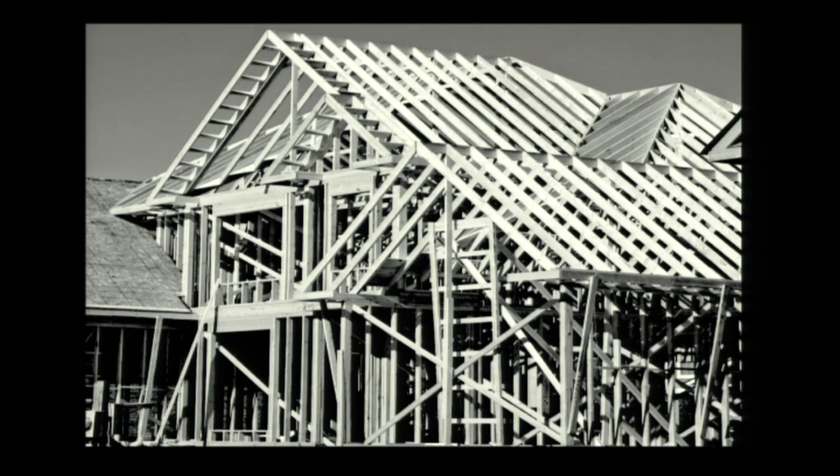And the science of wood is really changing, starting with that idea that the most simple things really can become the most profound solutions. Buckminster Fuller's a great engineer. This quote, that there's nothing in a caterpillar that tells you it's going to be a butterfly, which is very much where we are with wood. So when we talk about wood, most people think about wood buildings this way. And if you live in North America, as we all do, we've been building this way for 300 or 400 years. There's not a lot new in the way we build in lightweight wood. But obviously that's going to change.

Living in Vancouver, Vancouver's got this goal of being the greenest city by 2020, like lots of cities do. One really nice part of our story is that the company that powers the steam loop for the whole central core of Vancouver has just made a decision to move from natural gas to biomass, and that's going to cut Vancouver's greenhouse gas emissions by 25% by 2020. So we're actually going to get to where we are going, and that's going to be driven by, believe it or not, food waste and then wood biomass. So we are making headway.

But sometimes I have to kind of step back and say, as beautiful as Vancouver is, as beautiful as Seattle is, Vancouver looks like this a lot of days, right? We live in the rain, and we effectively live in a concrete jungle. There's not a lot of nature around us. We build buildings the same way over and over and over, and we really don't step back and say, does this make any sense?

The statistics really kind of bear true. So 40% of carbon emissions in North America are the result of the making and operating of buildings. The same is true in energy. 49% of our energy use in North America is from the making and operating of buildings. Transportation is second on that list. It's kind of the main conversation, but buildings are really the single largest industry that will impact how we look at energy and climate change in the future.

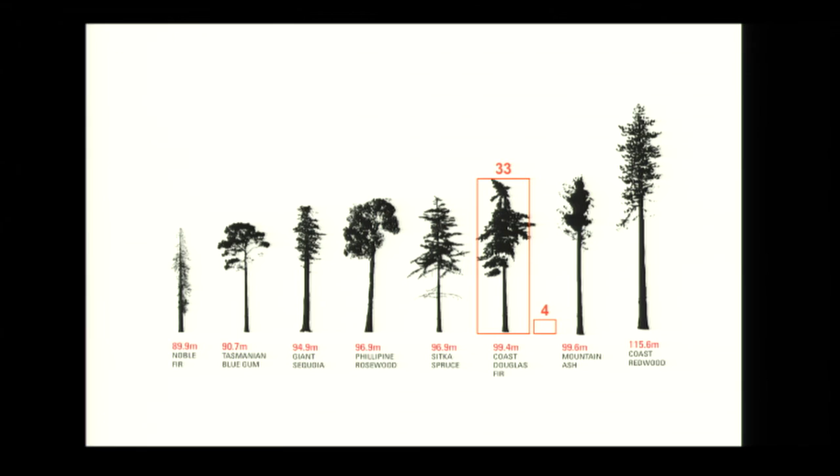So I sit on the design panel to review projects coming into UBC, and here are all these proposals for concrete building after concrete building, literally across the street from trees that are the exact same height. Obviously, there's a conversation of why can't we build buildings much taller, but here in Washington State and lots of places, we still have these limits of height. In BC, we now have 6 stories we're allowed to build in wood, but everywhere they've sort of capped out how tall we can build wood buildings for these urban environments. Everywhere they've done it on the assumption that we're going to build the exact same way we've been building for hundreds of years with lightweight wood frame construction.

So our work has been really about, you know, this number, 30 stories. That was a number we threw out. I threw out in Australia first about 7, 8 years ago, and people thought we were crazy. There's no way you can build a wood building this tall. And in fact, one of the best engineering firms in the world, the leader of their wood sector out of the UK was with me, and he said, absolutely, you can't build wood buildings above 10 stories. But in the last 8 years, what's been happening is this shift and this sort of awareness that not only is it a good idea to start looking at wood as a material at larger scale, but it's actually very realistic for us to build at these scales. We just have to completely reinvent the building code systems and really ultimately change the way people think.

So now we're actually talking about going much higher than 30 stories. And in fact, there's a study that came out with SOM, who are a huge architecture engineering firm based in Chicago, but all over the United States, all over the world, who also built Burj Khalifa, the world's tallest building. They did a study that said they can do 42 stories by combining concrete with wood. So now what we're seeing is that an idea that at first seemed kind of insane to build in this very new way, because we largely have only had for the last 130 years these two materials of concrete and steel. Now all of a sudden we're seeing people say, oh, maybe that does make sense.

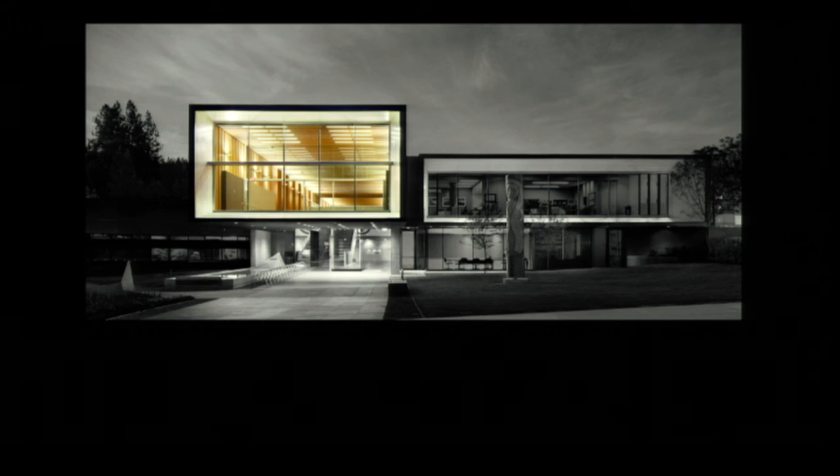But LVL and LSL have been made for a long time, and so we decided we would do this project, which is City Hall in North Vancouver, and we would do it out of LSL. And we would use it as a tool. It's an addition to an existing concrete building. So on the right is the existing building, and the big cantilever is the new wood piece. And we would do it as a tool because we were already exploring these ideas of how to build big, but what we knew is we needed to work in these huge panel sizes.

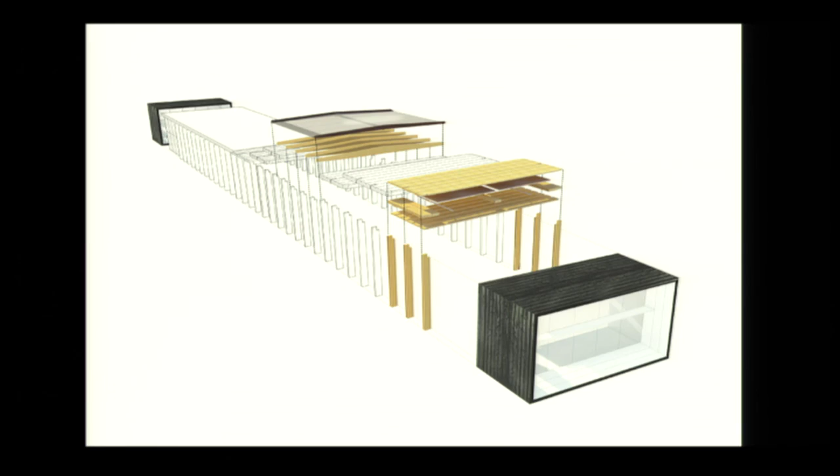So we convinced, in this case, Weyerhaeuser to give us these huge panels. They're 32 feet long and 8 feet wide, and glued them together to make this space. This material is typically just buried behind gypsum. But we said, no, it's beautiful. It's actually all aspen. It's a beautiful material. It's made out of small little flakes glued together. It's very strong. And we wanted to show how it could actually work so that we could then take these ideas and start building taller and taller.

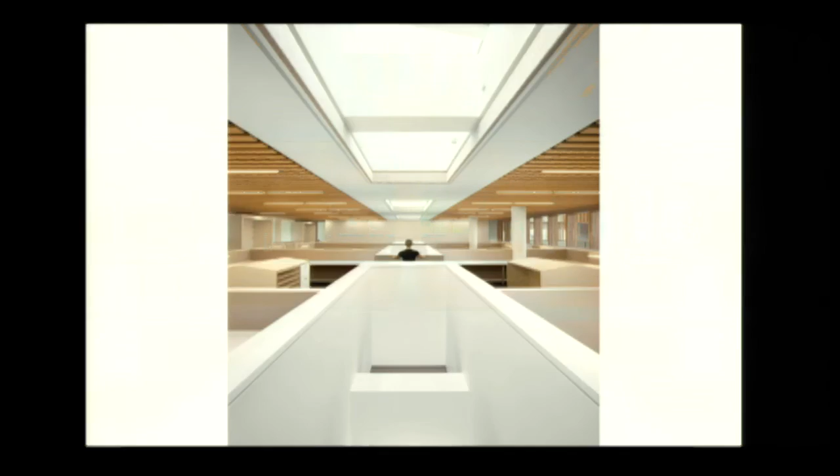And so I'll just show you a couple images of this project. It was a very interesting process because about halfway through, CLT came to Canada. So CLT, cross-laminated timber, there are 2 big manufacturers right now in North America, one in British Columbia and one in Quebec. Nobody here in the States yet. And so if you can't have 3 companies competing, it's hard to keep prices down. And so by introducing laminated strand lumber as a competitor to CLT, we realized we could keep the prices down and make these ideas start to happen.

So because our government in British Columbia realized this is good for our economy, it's good for our small forestry communities, they also recognized that they weren't going to be able to sell these CLT or mass timber panels into the small scale residential market. They started to turn to folks like Andrew Waugh in the United Kingdom and ourselves that were interested in moving into these urban environments. And at the time of the downturn in 2008, in the global economy really, we used to export a lot of our wood down here to the States, and the housing market collapsed here and everywhere.

And so we turned to China, started sending our wood to China. And we still send a huge amount of our wood to China. But when we send our wood to China, China uses it to make formwork for concrete buildings. And then they take all that leftover wood from the formwork and they throw it in the landfill. It's a travesty. So one of the things I really believe is that if you cut down a tree, you honor that tree's life by finding an incredible use for it. Even if it's the most spindly, awkward tree, its life is valuable. And we can turn it into great buildings, even though a lot of people throw it away.

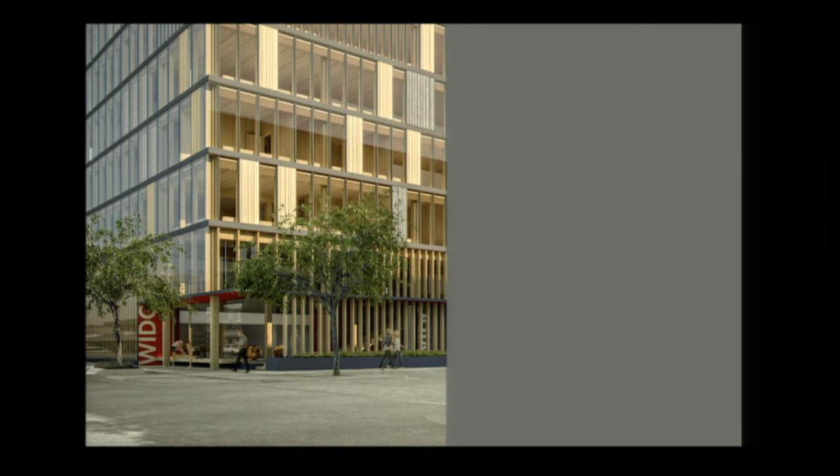Tomorrow the structure's topping out with our Premier, so that's where I head from here, actually. And so this building's already built. The main frame is up. Everything's wood, and that's a real change.

So we're not used to building this way, and so it means that we have a huge amount of research that goes into it. So we lean heavily on the National Research Council of Canada and the Forest Innovation folks in BC and different testing people to say, how does it work for acoustics and how does it work for fire and how are these buildings really going to technically perform, because there are no examples for us.

It's a great way to lose money, by the way, if you are an architect, to get involved in this kind of stuff. But it's so meaningful and it's so fun and it's so exciting because you are on uncharted territory when you build this way. So this building's unique because it's made out of cross-laminated timber panels and there is no concrete.

So we've been building these taller buildings. Andrew Waugh in the UK built a building in London that's 9 stories tall, and that was finished probably about 6 years ago now. When he first built it, it had to, for fire, be covered up. So they built this beautiful wood building and then completely covered it up with drywall to protect it from fire.

If you're going to change a system dramatically, it's got to be cost effective. It can't be about environmental issues. That might be my motivation, but that's not going to be the consumer's motivation 9 times out of 10. So it's got to be cost effective and it's got to be beautiful. Wood is beautiful and we got to showcase it, which meant we had to reinvent the way we did it.

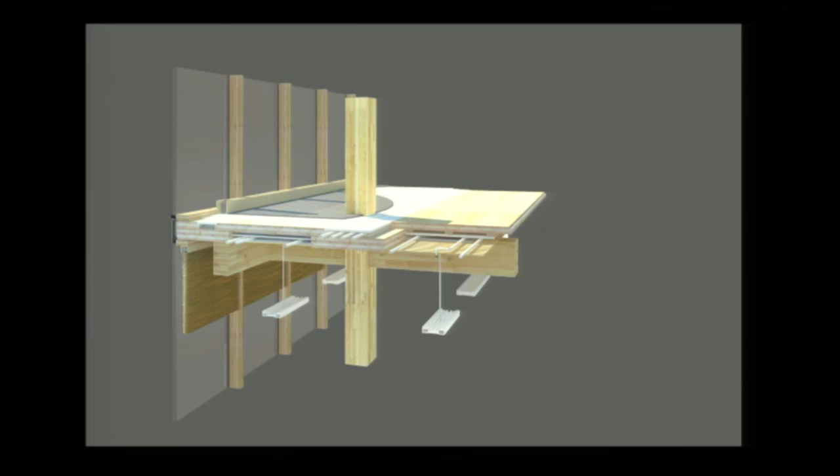So in this case, what we've figured out how to do actually is have these floor slabs that are stacked on top of each other. I won't go into the engineering side of it, but it's really exciting for nerdy wood people like me. It hides all the services, all the sprinklers and everything, so that just the wood is exposed. Kind of like a concrete building hides things inside the concrete, we've figured out how to do the same inside these wood buildings.

And most importantly, these buildings have always, to date, had a thin concrete topping on top of the floor, and they do that to control sound. But we've figured out how not to do that. And why that matters is that buildings have a life cycle.

When we traditionally look at the life cycle of wood buildings versus concrete, masonry or steel, wood sometimes suffers because people assume it won't last as long, it's not as durable, and then what happens to the wood at the end of when the building's done? Concrete you could theoretically grind up and use as an aggregate. Steel can get recycled. So what's the end story with wood? Well, the beauty of these systems is the end story literally is unscrew it and build a whole other building.

As long as the wood is protected on the outside, we can actually just keep going with this material. It's certainly going to last as long as concrete or steel as a structure, as long as you maintain the exterior enclosure of the building. But most importantly, you can take it apart. But you can't take it apart if you top everything with concrete. It makes it a lot more complicated.

So we've now figured out how these buildings will not only go together incredibly quickly and cost effectively, but also how they go together dry. We call it dry construction. And if we get rid of the concrete, we solve all kinds of problems for dismantling the building. So we're pretty excited about it. Actually, we use impregnated sand panels that dampen the sound.

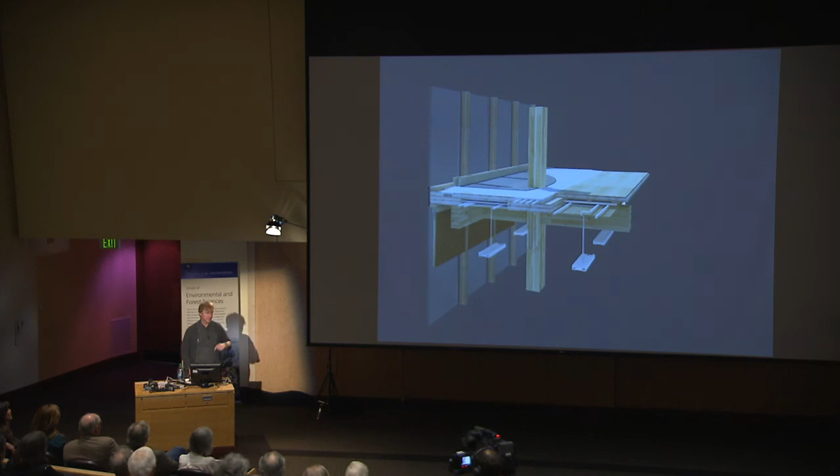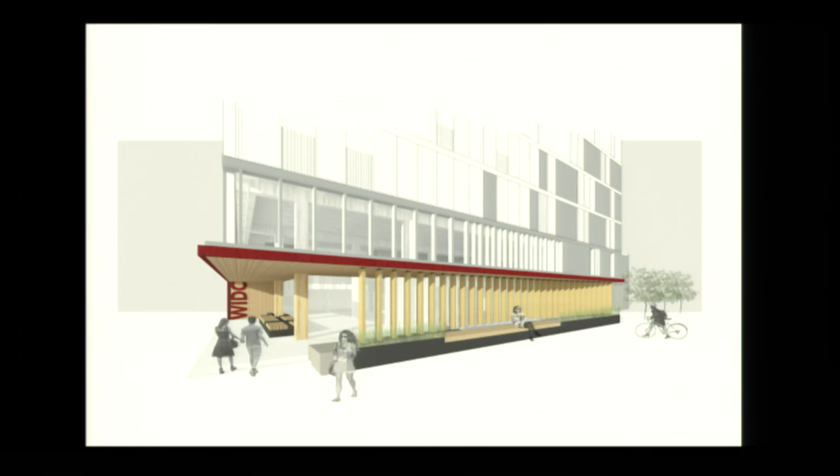So it's a highly unusual building to walk around because it's all exposed wood. And it's pretty exciting. Every aspect of this building is wood. I think I have a little movie, actually. I'll jump forward to see if this goes here.

Okay, I'm going to talk over the sound too. Because the funny part is, if you saw my TED Talk, I do a little movie in there. You're not allowed to put sound to a movie. This is U2, Beautiful Day, the sound. So Bono spoke at TED last year with me, and I thought, cool, I'll show up at TED and I'll get Bono's permission to be able to put this song on my little video. He said absolutely not, so that didn't happen.

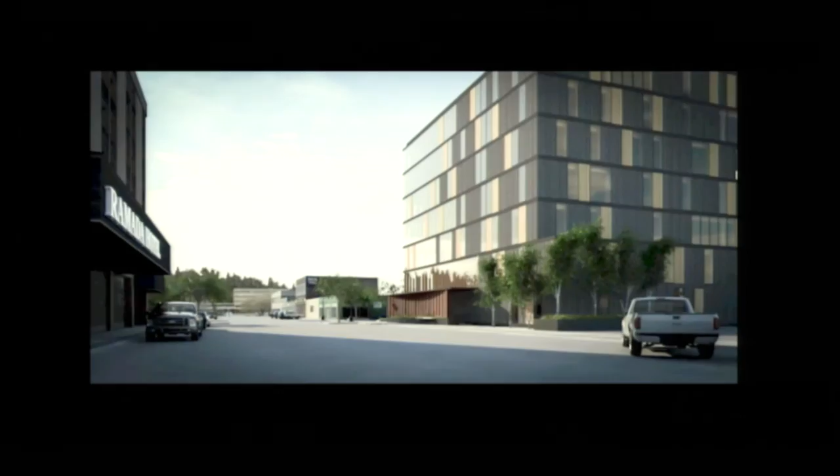So anyway, what's cool about this building is it's the Wood Innovation Design Center. So it's actually a building, sorry, I'm supposed to stay in the light for the TV camera. It's a building about wood innovation. It's actually for the University of Northern British Columbia. They're going to put an engineering program in for the study of tall wood buildings. So this is actually currently the world's tallest wood building as of this week, which is pretty exciting.

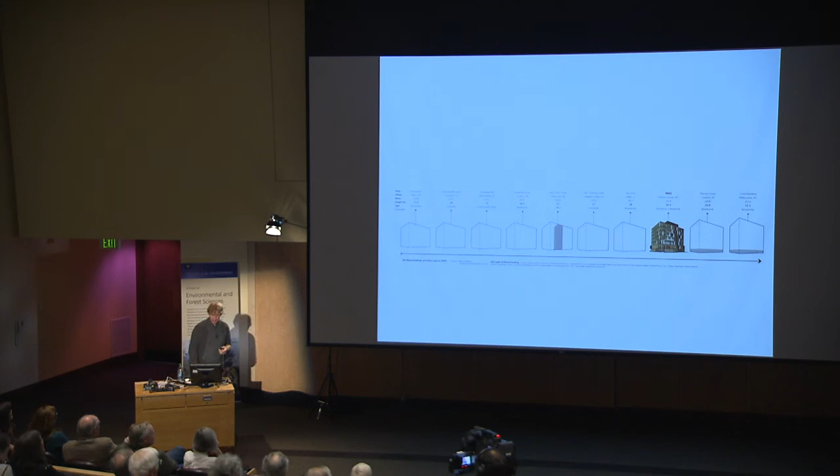So there are a bunch of these buildings being built, and as you can see, I had this funny experience of speaking at the Architectural Innovation Conference in New York with Bill Baker, who's the guy that designed Burj Khalifa, the tallest building in the world. So he got up and talked about that, and then I got up and talked about this and said, look how tall they are, isn't it great? It felt ridiculous, but we're getting somewhere. And as I said, that competitive spirit's what's going to take it. And the reason this is going to happen is because it is cost effective. And the reason it's cost effective is because these panels go together really simply and quickly.

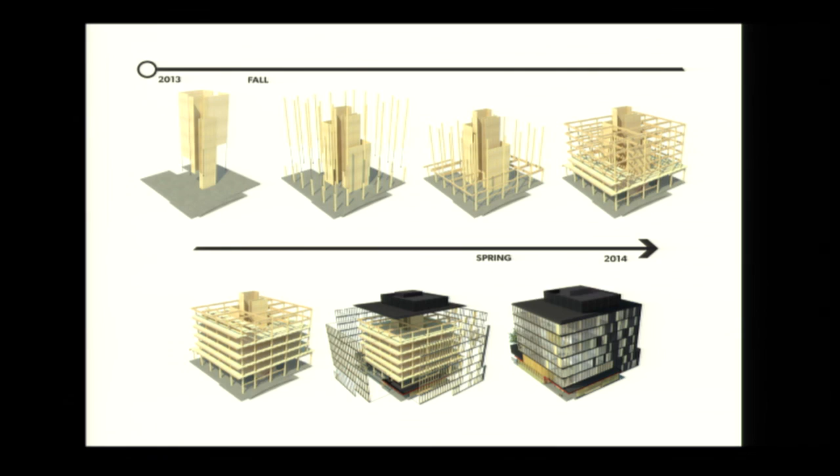An anecdote I like to tell is the Prince George project is about 8 blocks away from a Delta hotel that's being constructed in steel. On our site, the only noise you hear is cordless screw guns, very quiet, and all you hear is the sound of the construction site 8 blocks away. Putting together a wood building like this is quiet. It's completely different than what we're used to. And these things have real meaning.

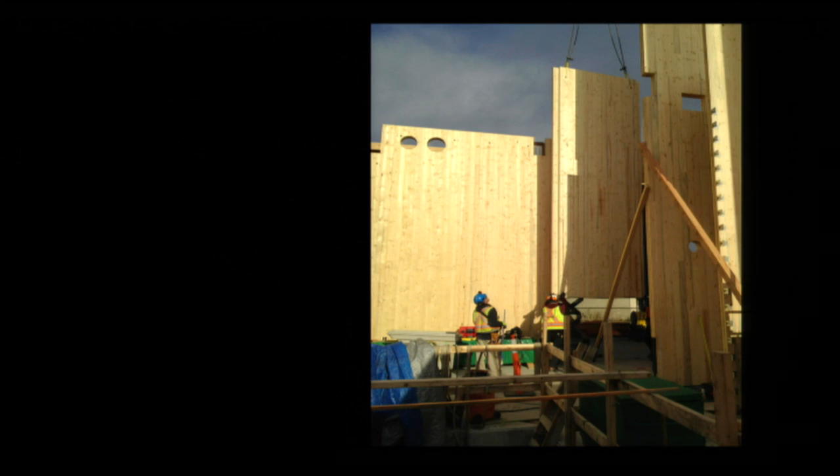So this is what it looks like, these big panels going in. It's beautiful, right? It's pretty low grade spruce in this case, but it's incredibly beautiful. And now that this building's built, we're going to use it as a tool to actually bring code officials and different people that are interested, anybody here that would like to see it, we'd love to give you a tour because it's a learning tool.

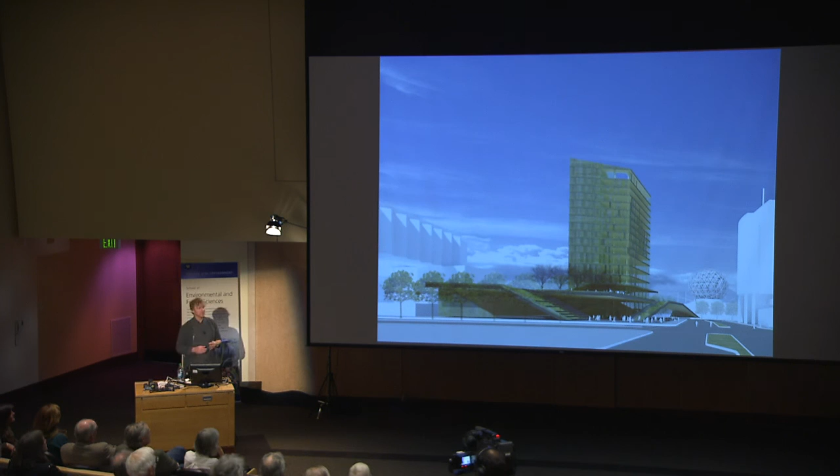This is the airport in Prince George, which I also designed and built about 8 years ago. The building, the WIDC project, should have this same feeling when it's done. And it's a community that really has embraced the idea of wood. So I like to show these images just to kind of say this is what's coming. So really quickly, I'm going to show you a couple more things. This is the next one we're doing. If you know Vancouver, that's Science World, the little globe there.

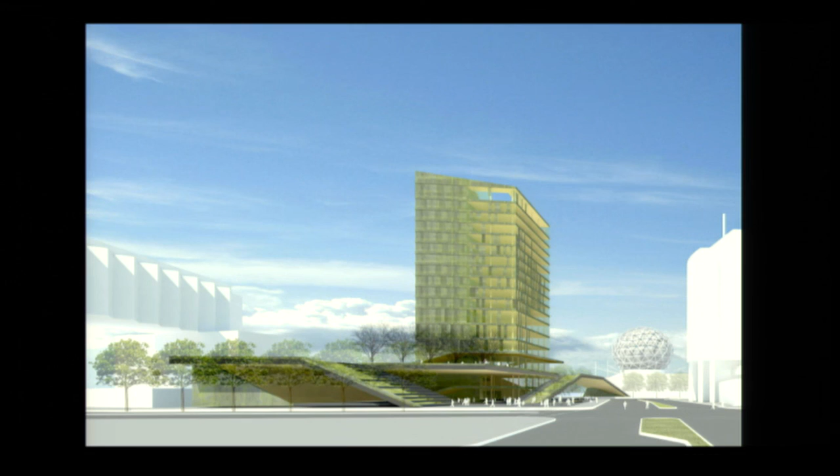This is a vertical farm. It's actually the food bank on the left, a public market on the right, on the ground floor, a roof plaza level that's got all this agriculture on it, and then it is 8 stories of vertical farming where we use an organics digester to basically power the vertical greenhouse. And then it has a hotel, and then on top it's more of a greenhouse for flowering fruits and vegetables and a restaurant built literally into the greenhouse so that we get this incredible view of downtown Vancouver in a 20-story tall wood building, twice the height of the last building I just showed you.

So all going well, this is our next step in Vancouver, and the city of Vancouver is really excited about this. I got some hurdles to get through financially to make this happen, but it seems to be going well. We also have our universities that have said they're going to build an 18-story dormitory in wood. So although these ideas are still pretty early, the buy-in is starting to happen.

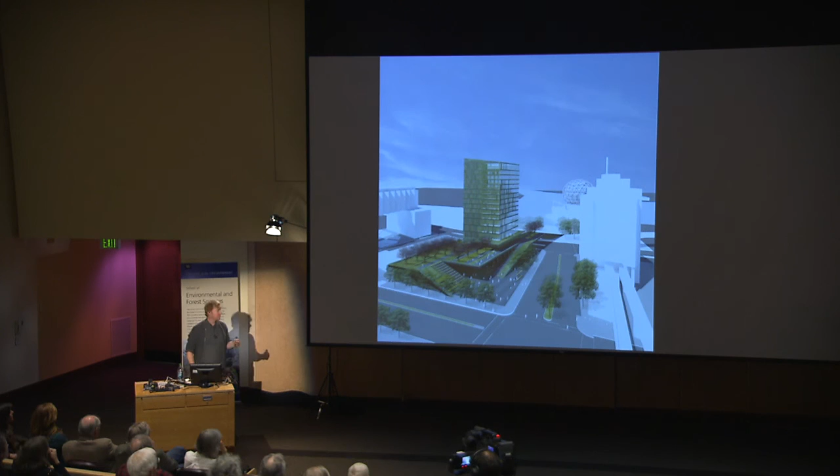And every day somebody emails me from somewhere around the world. Somebody in Sweden wants to build 32 stories. Somebody else wants to build 22. It's really a great time because we don't know what these buildings are going to look like. We don't know what the character of them is going to be. This is kind of a beginning. But every time we touch them, we invent a whole new way to build.

So this vertical farm is built in a completely different way where we figured out how to use less of these materials so they're more cost effective, but in a neat way that allows us to hide all our services, actually create a very effective acoustic solution, which is a challenge, and to make it faster to build. So this is kind of a zigzag system we're currently working on.

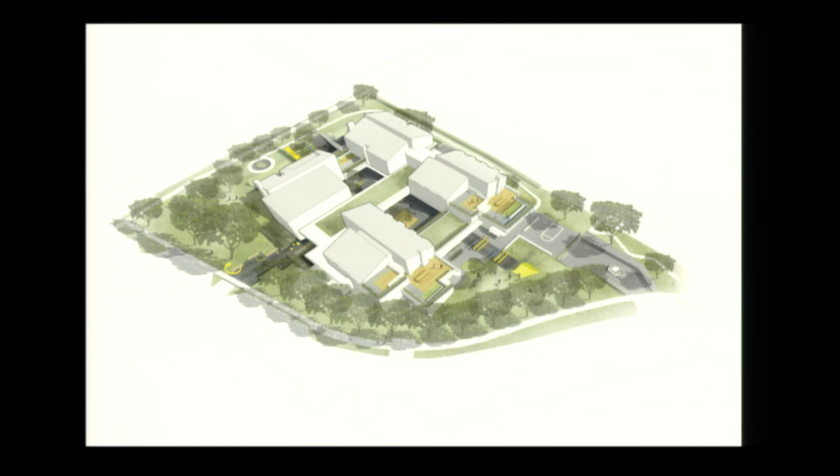So the thing is, it's not just about height, and I'll just show you a few more. So what I'd like to see is that we start seeing in the United States, because the building codes don't allow it, these new mass timber panels are going to allow us to build buildings on university campuses. So if you walk around your campus, everything's masonry, and the assumption is it's got to be built on top of masonry or built on top of concrete.

And almost all your buildings here likely are, and some steel, no doubt, too. But I imagine there aren't a lot of wood buildings. I know the forestry school has some. So I wanted to talk about that. The idea that building a building structure is not the same thing as the building look.

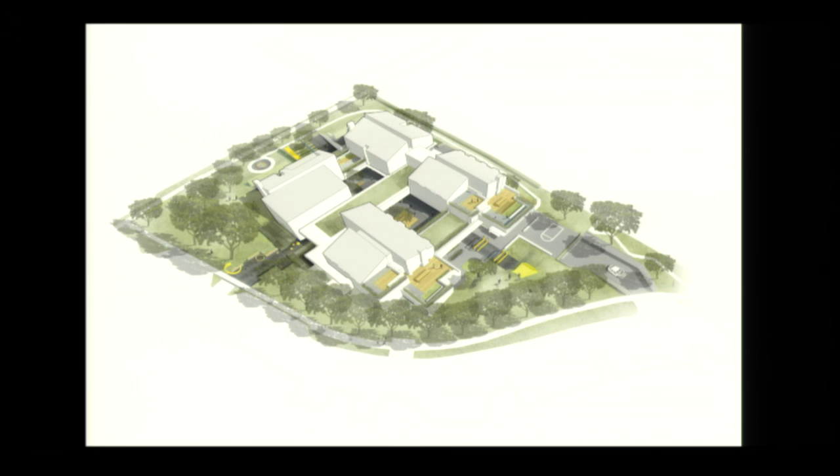And this is Ronald McDonald House in Vancouver. It's the third largest Ronald McDonald House in the world. It'll house 73 families. It's a project that I love to talk about in a completely different way than I'm going to talk about tonight, about the sort of social quality of this building. But it's also a brick building. But it's a brick building that's built on top of CLT, which I'll show you in a moment. And that's what the construction of this building looked like.

Because we live in a seismically active area, if you build a big masonry building, and even not at great heights, but in this case it's a 4-story building, I don't feel comfortable putting that on 2x4 construction, and I want to use wood. Everybody normally would turn to concrete or concrete block. We now have a completely new way to build because these panels literally tilt up 4 stories at a time, go together really quickly, and you can clad them however you want. They don't have to look like wood buildings.

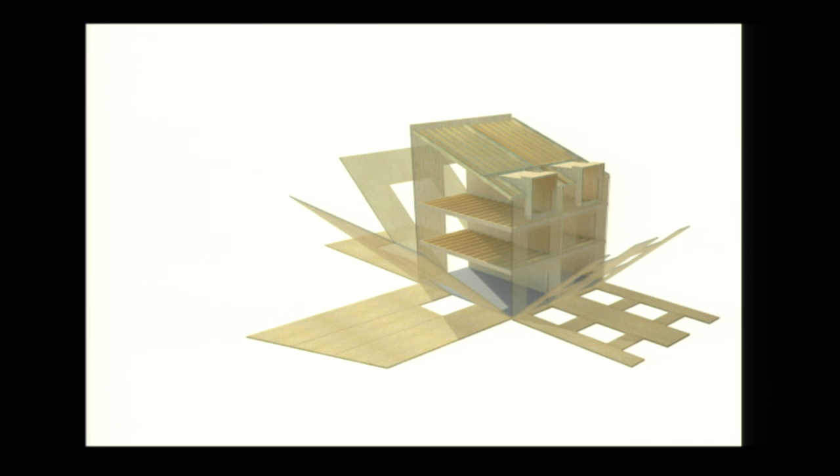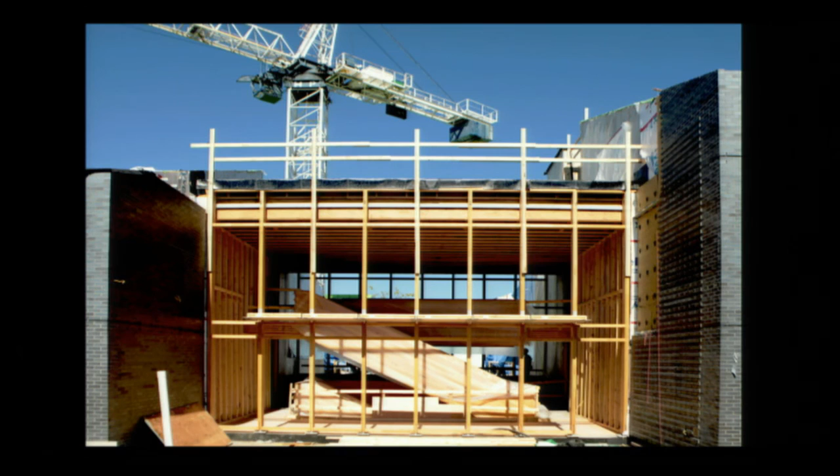And now, unlike that story where we're exporting all these 2x4s to China to turn them into formwork, we have a material that doesn't even have to wait until the building codes change, that'll actually change the way we build even at low scale for these long-term institutional buildings. So this project's actually finishing in a month. And when you walk around it, it does not feel like it's finishing in a month at all, but it's pretty cool. And if you come to Vancouver, come for a tour if you're interested, because it's an amazing facility.

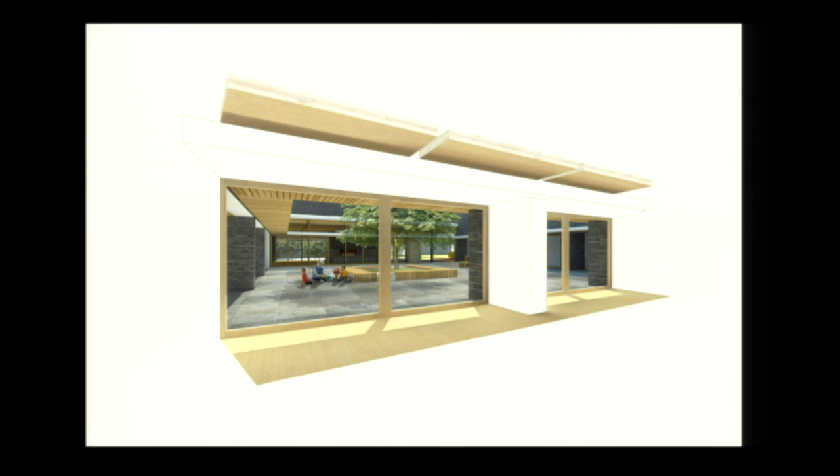And my firm's been involved with Ronald McDonald House for 5 years now. We go in and cook meals for the families, and it's just a really rewarding place. But it's also really exciting because you're going to have this building with a lot of exposed wood on the inside. Big slides and these crazy big stairs. There's the stairs going in.

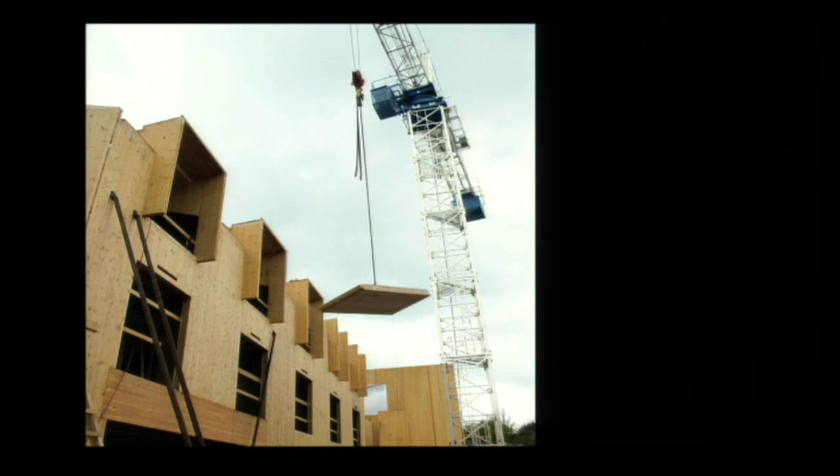So one of the things I often point out is that the building looks spectacular when it looked like this. But you can't leave it like this. The neighbors were all bummed out when we covered it up with brick and said, why didn't you leave the wood? But you got to protect it. But you can see that it's a really different look of how a building gets built because you're lifting these big panels. There's no waste on site. Everything gets cut before it shows up. And it allows us to use wood in new ways.

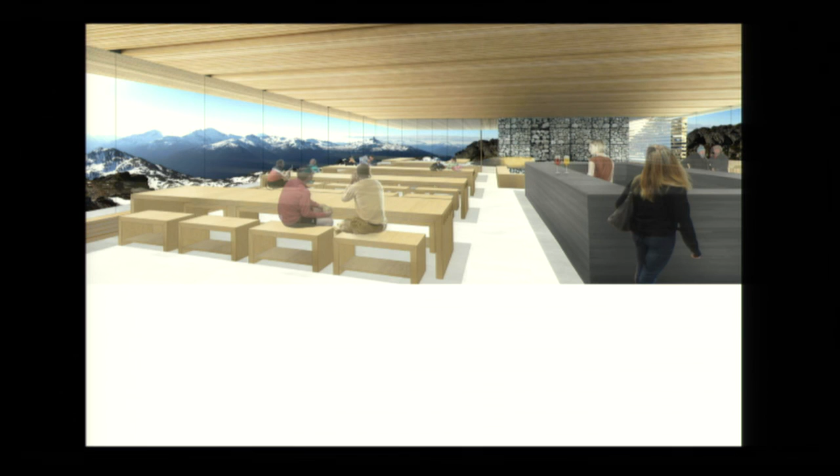This is a building we're building on the summit of Whistler at the top of Harmony. We get 3 months to build it. These panels allow us to build really quickly. The snow load up here is 12 feet of wet snow. That's what we have to design for. They're really strong panels. We can helicopter them into an environment where we normally can't build and get a spectacular building with an incredible view. So we're pretty excited about this one.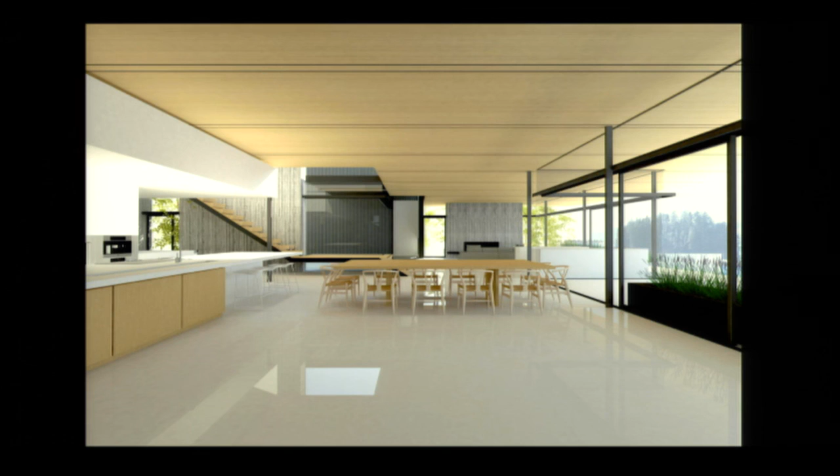This is a house on an island, same story. Everything has to be barged in. So we're using these panels to kind of open up new places that we can actually build more quickly and more cost effectively and get way more beautiful buildings. So this is under construction, actually. These are just renderings.

And then I mentioned China, and I guess I'm gonna do one more project after this, but if you go to China, it's a shocking thing. I've only been twice this year, and I've been just absolutely blown away by the quantity of concrete buildings you see, towers. Every 5 minutes you see 20 towers under construction that are 30 stories tall. They're built side by side like dominoes. There's sometimes smokestacks coming off of power plants that blow right into the side of the building. The air quality is just unbelievably bad.

So we were asked to design a contemporary art gallery in Xi'an, which is where the terracotta warriors are. This is our site visit, and when we stood there, that's pollution. When I asked the client, this is our site, are there mountains around that we could see? They literally said to me, we're not sure, we've never been able to see very far. They're so used to it, they think it was fog.

And actually, just a nice little anecdote, because the US Embassy in Beijing started posting on the edge of the building what the air quality was, and people in Beijing started to become aware of the air quality, that's the only reason that China really finally started disclosing to its own citizens just how bad the air is.

So we have this cool little opportunity where we're going to introduce these panels for the first time ever to China. China's the place we need these panels. This is the change that needs to happen. They are building faster and bigger than any of us can imagine. And so they're the game changer.

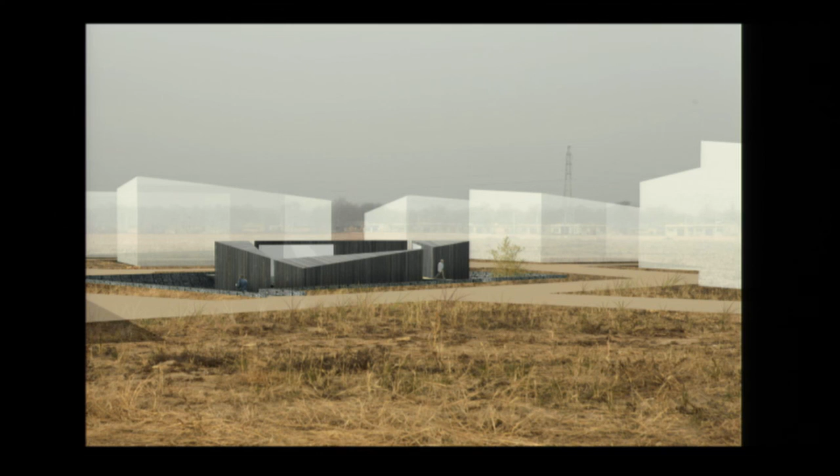So the reason I'm telling you this story is because we've been playing around with this solution that we're actually going to dig this gallery into the ground. It'll kind of show up somehow above the ground a little bit. It'll be made out of these materials. But more importantly, we're working on a solution that uses a charred wood roof structure where we burn the wood like a carbon filter and literally bring the air of the building through the carbon filtering of the roof structure to try to purify it before it goes through the gallery.

And so it's our chance to tell a little story, not only that these wood products are pretty exciting, but the ways we adapt the wood products, really using traditional natural systems, are very practical ways for us to start dealing with some stuff that they're just barely learning to tackle around their smog issues. So we'll see how this goes, but it's a pretty fun little project.

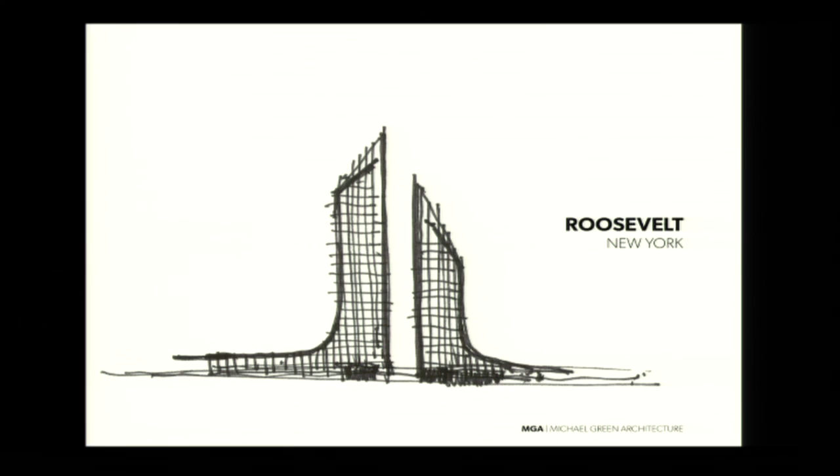And it's really interesting because they are chasing what our image of architecture is. They want big, glamorous, big buildings. And I think we need to do the exact opposite. Start looking at how we do really simple, beautiful buildings that serve people's needs.

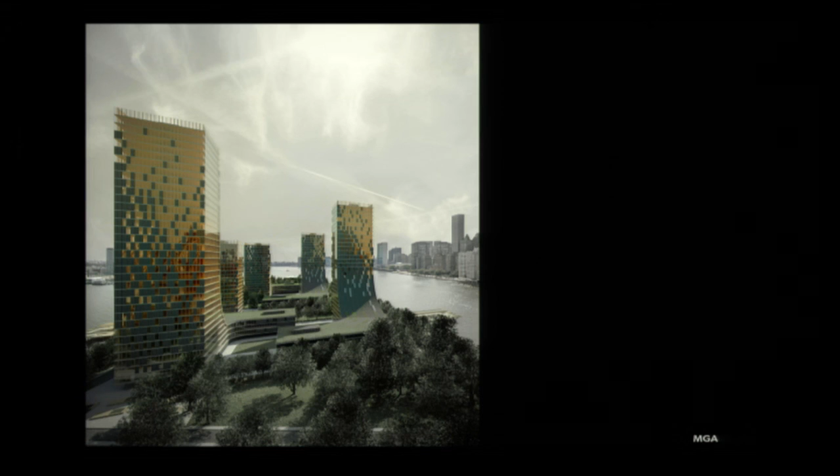So the last project I'll show you is just what if. And it's a what if of what does a city look like when it goes big in wood? I don't really know. It probably doesn't look like this. For architects, the challenge is every major movement in architecture has happened because of structure.

So the Greeks didn't space their columns the way they did just out of random. They spaced them because there was a rationale, not only an aesthetic rationale, but a functional construction rationale of how big a lintel or beam you could put and lift to that height and span a certain distance. The architecture followed what was reasonably possible based on the technology of the time.

As we fast forward to the industrial age and we started being able to move huge quantities of concrete and steel, it created our skylines. It created every city on Earth, and now, sadly, every city on the Earth looks pretty much the same. It's really sad. We've kind of obliterated any notion of regionalism. And, you know, every tower looks the same, and you have the same architects designing towers in New York and Singapore and wherever. Just like my old firm, right?

So the opportunity here is really interesting. This is the springtime idea, okay? This is why I think we are at the beginning of a new era as designers. When you introduce a new structure, it has a whole new set of rules, and we're still playing with those rules. But it also means we can completely reinvent what the looks of buildings are.

Where I think we're going, truthfully, is into a world of 3D printing of biological material for buildings, and buildings will look a lot different 10 years from now and 15 years from now. Wood is the sort of bridging material for that. But it's also the beginning of a very new aesthetic of our cities.

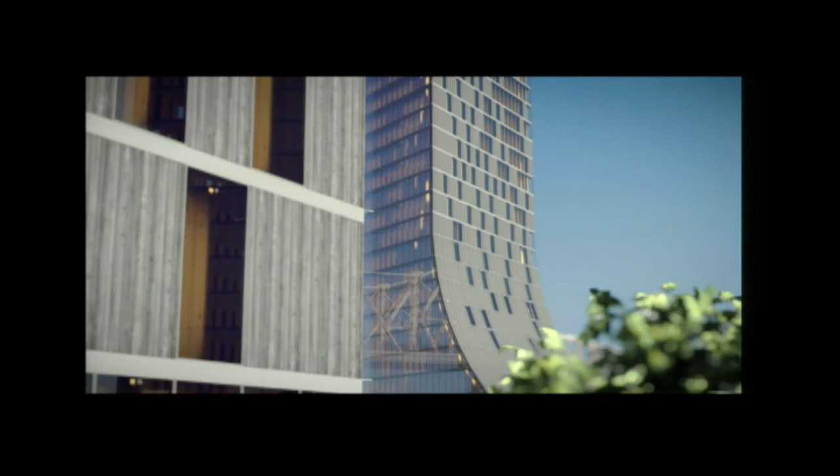So we put this together just for fun to say to New York, this is what it might look like. And this has music too. And then I'm done, and I'm going to take your questions right after this. I showed this in my TED too, so sorry if you've seen it.

Much like any other building right now, but we'll see what happens. So thanks, and I'll take some questions now.

Kat, you're up first. Hi, Michael. Hi. So this is just incredible, and you know that I'm very energized by this, and I'm sure a lot of the other folks are too. But I'm wondering what 2 or 3 or 4 or 5 things you would recommend that we could collectively do to put our shoulder behind this and make it a reality here in Seattle or anywhere?

Okay, so a bunch of problems or challenges here. One is that there are, as I mentioned, 2 manufacturers of these materials in North America right now. There's some folks that are building in Montana. There's some people dabbling with it, but that really can build mass timber, there's only 2, and they're in Canada. That's a problem. We need 3 or 4 in the United States, and soon.